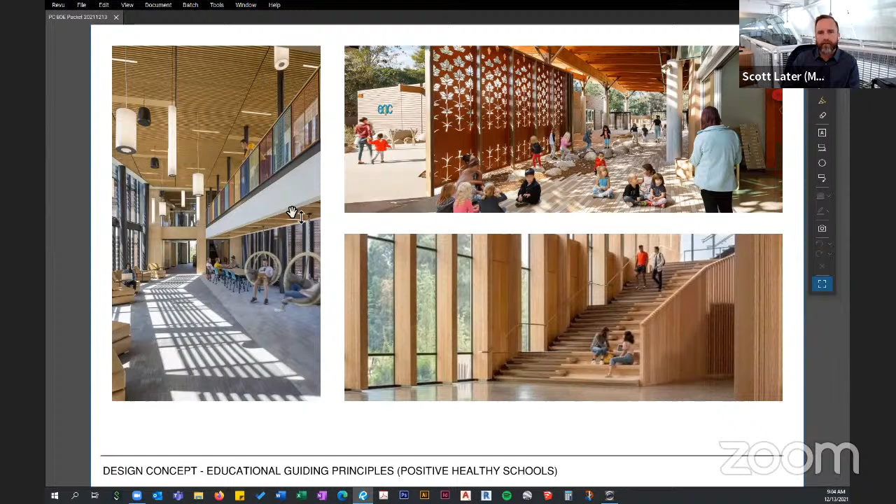The idea of positive, healthy schools, looking at blending ideas of interior and exterior environments, really bringing that outside in. Talking about relationships and finding spaces within both buildings for students to gather to celebrate learning and put that on display.

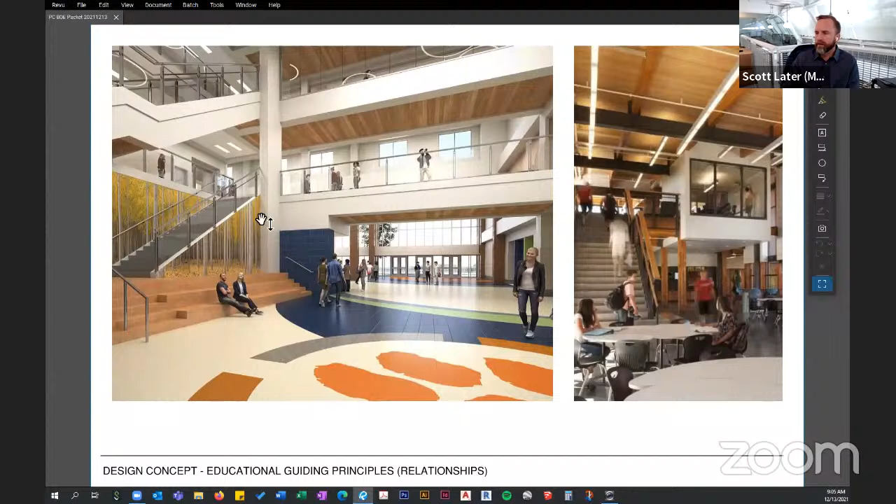As we know, CTE is really a primary function for all of these ideas, underpinned by this idea of real world experience, that these spaces we're developing currently can reflect ideas of connecting to community and to those certification programs already within the district, and looking at how we can bolster the CTE efforts within the district.

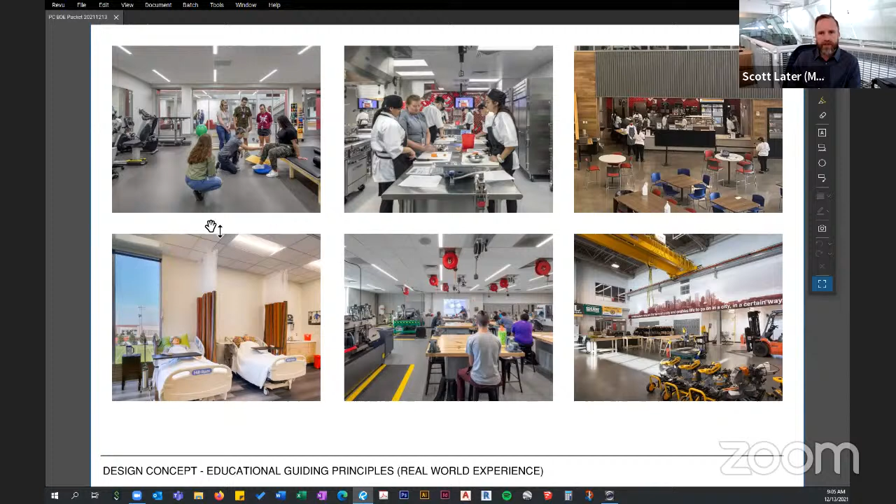We're going to continue to refine these ideas, working closely with Roger and Amy at both schools to understand the specific needs for these spaces. Lindsay Huntsman has also been involved in our work sessions and has been very helpful in providing information about how we move forward on these concepts.

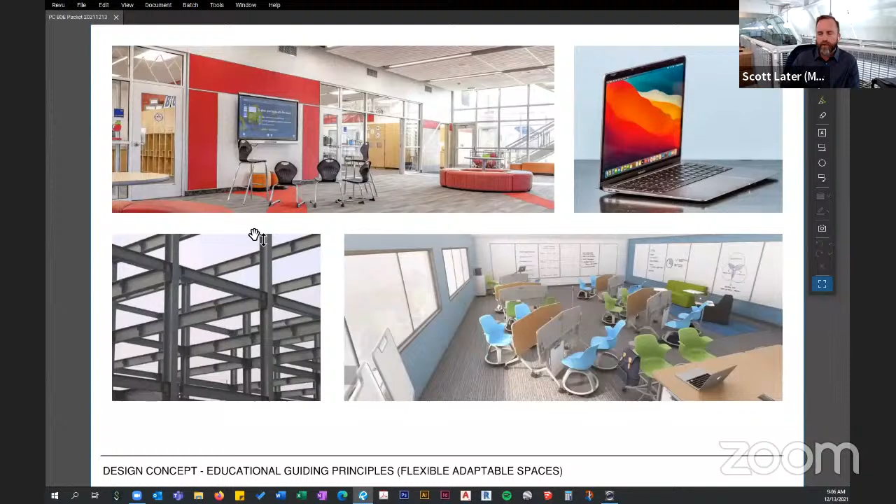In terms of flexibility and adaptable spaces, we are still leaning on the idea of steel construction so that in the future these buildings could pivot and adapt. We also feel it's very important that furniture, technology, and all of these things together can really support the district's goal of creating flexible spaces, and finding the places to celebrate inclusion for all as we move forward.

As we know, LEED Silver is a conversation and is ongoing. We've had some very good preliminary ideas and thoughts about how we can achieve these. I'd say they're still in the cooker right now, and we'll continue to refine those and present them at a later date.

It's important to note that we're understanding the goal of 35 for the EUI requirements for both schools. Wade is on the call today from Van Boerum, and may talk a bit more about this for the other projects. We have a strategy moving forward for both schools to meet these EUI requirements. 35 is aggressive—as a comparison, your existing schools for the high school and Ecker are in the range of about 60 to 85.

And so it's going to be a real big sweep in terms of coming back to that 35. But there's some fantastic things that happen long range in terms of sustainability.

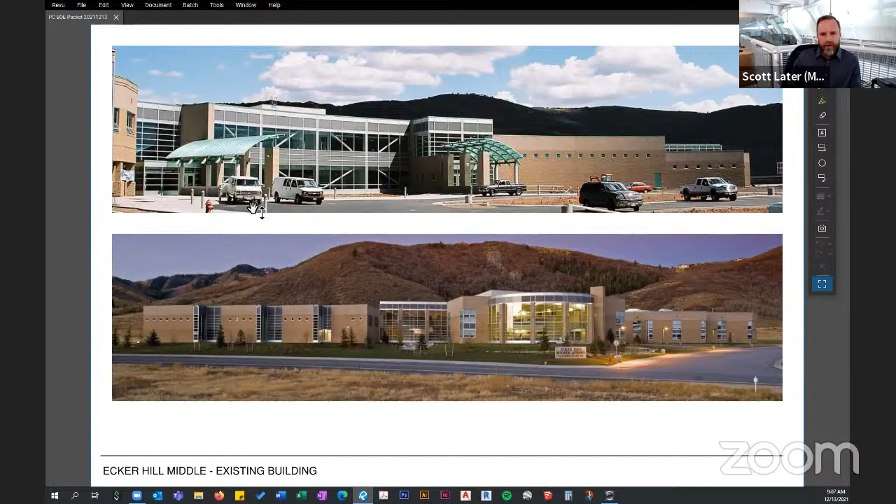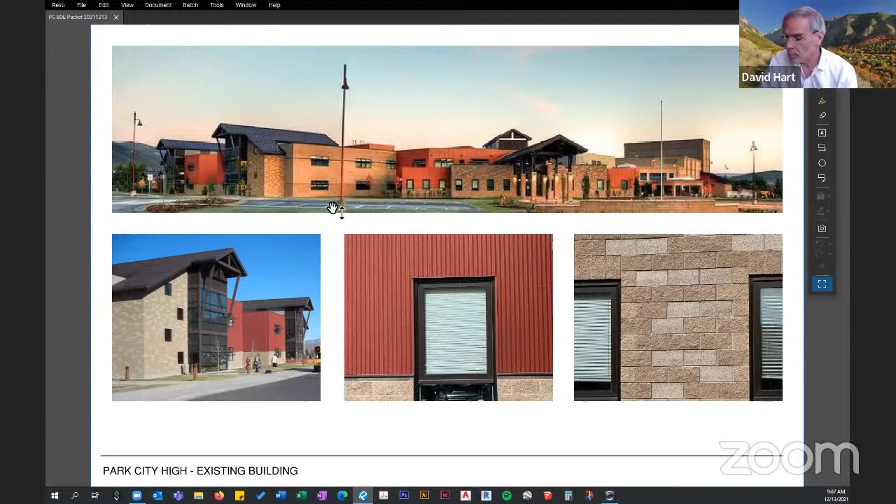So let's talk specifically about these two unique schools. You're seeing on the screen some site imagery we've pulled from Ecker—very unique in terms of characteristics, especially as you're driving along I-80, with a great presence along the foothills. There's also very strong character to the design elements associated with Park City High School, and we want to celebrate all of these ideas as we move forward.

As our team started to look at how we encapsulate all of these ideas, we were really taken by the beautiful scenery that surrounds both of these projects. There's also a lot of site context we felt was important to reflect—lots of textures and patterns. Connection to the outdoors is obviously very important, but we feel there are a lot of design ideas already within the community that we can start to build on.

We also came back to this idea very early on about a concept of a nature pavilion—that both of these structures, both buildings, could take on more of the feel of a higher ed building, a place that blends ideas from interior to exterior. Not that this is necessarily what you'd see at the end of the day, but this concept of more of a pavilion piece sets the stage for future development that could happen down the road.

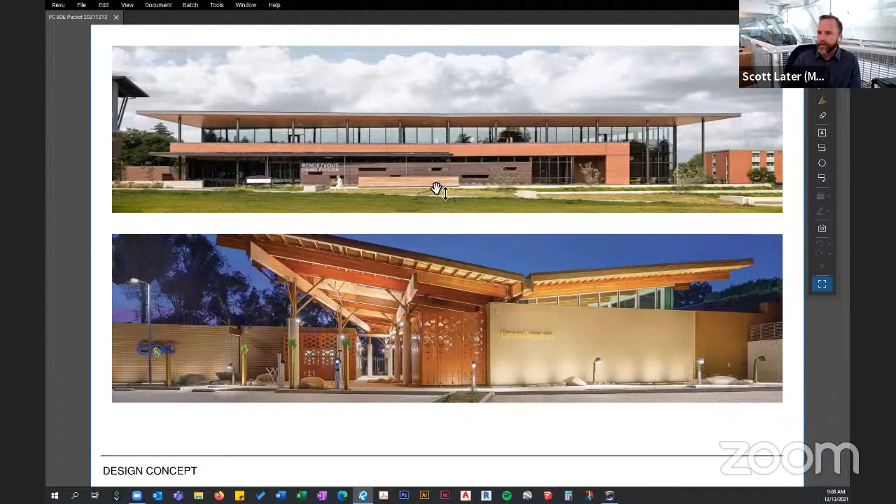As we've talked with Hogan and their team, it really feels like a strategy of having two phases for this project, like we've always discussed, with the CTE wing on the north side being the first phase of demolition. We've talked with Roger and coordinated in terms of where those students temporarily go.

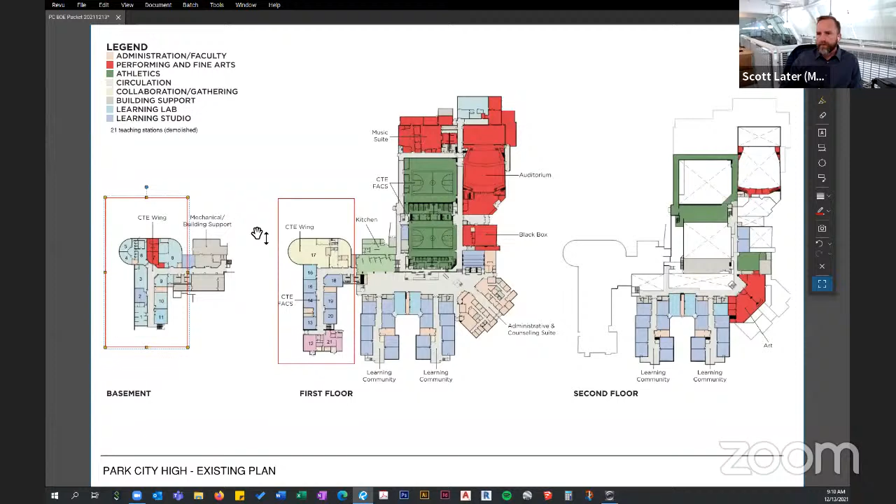So as you remember, the master plan looked at—as we demolish—adding this linear piece along the western edge. We affectionately call this the bat wing, just because the two areas splay.

What we found, though, as we dove deeper into some of the site constraints, is that we wanted to maybe rethink the overall shape and perspective of that piece. To highlight a couple of things we've found since our previous conversations: we now understand there's a pretty extensive sewer line that runs straight through the middle of that site, and that the visitor bleacher, from a pure cost standpoint, would be ideal if we could avoid.

We've started to explore alternative plan layouts that squeeze things down a touch, taking our learning communities, which were initially groups of 7 or 8 classrooms shared around an open collaboration space, and clustering them into groups and pods of 4.

From a pros standpoint, this allows us to keep those visitor bleachers, which could be a future project if improvements were needed to Dozer Field. We can also still provide fire access from Ecker Street to Lucky John.

Additionally, you're seeing the rework of the back of house area. That horseshoe area would need to be regraded to provide delivery access to those spaces and additional parking stalls. This was a request from the PC CAPS group so there's parking available for mentors entering from the backside, and it could also supplement staff parking for food service folks.

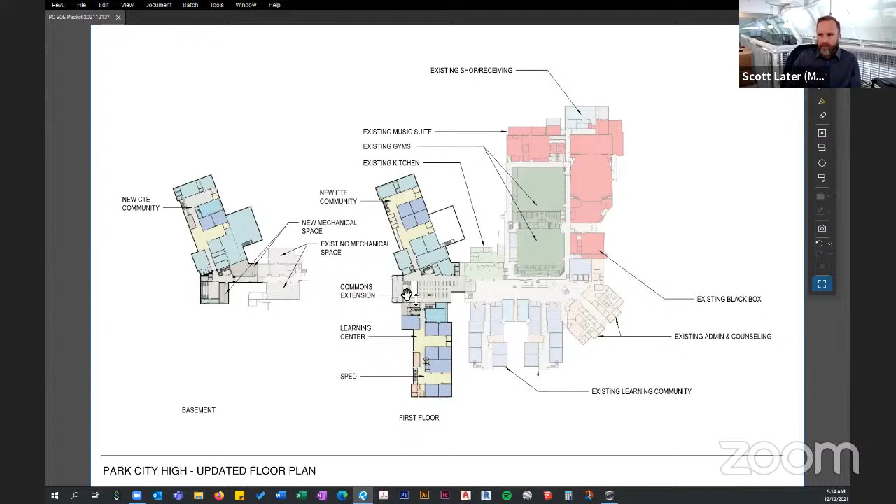One last thing to point out is the expansion of the common space, which should allow for an additional 300 seats in that common area, as well as a new learning stair component that would sit at the end of that space.

As we shift up to the 2nd floor, you have a lot of general purpose classrooms. We worked with Roger on this to understand the number needed, accounting for all the students from Treasure Mountain coming into the building.

At this point, we're at a net gain of 20 to 30 classrooms. So we really have all the CTE spaces, the PC CAPS spaces, and the general classroom spaces, in addition to what we've lost with the demolition of the existing building.

You're also seeing the introduction of a new media center space. As you'll remember, the current media center has been allocated to the PC CAPS program, and there was strong consensus from the community, Roger, and his teams that there needed to be a space for community gathering as well as celebration of the media arts.

Before we shift to Ecker, can I answer any questions about the PC High School project?

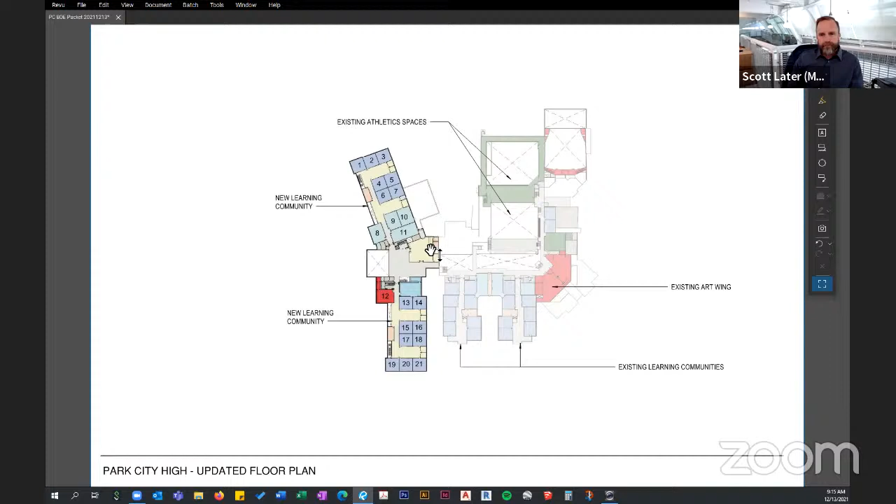Yeah, one question, this is Andrew. We've gotten some questions about the use of parking during construction at the high school. I know you've probably been asked this before, but since we're on this call, what is your anticipation of the number of spots we'll lose during the construction project? Not overall, but we have Park City Mountain and others who use our lots during the year, and they're redoing their lots, so they'll be relying on us to provide ours. We want to make sure that if we're losing a ton of spots during construction, we can communicate that to them.

Great question. It's something we're currently evaluating right now. John, I don't know if you have any additional feedback. We for sure during that first phase lose a lot of the back of house areas, which is not necessarily where you guys are parking currently.

As we shift to phase 2, there will be an impact zone. Really, it's kind of undefined at the moment because we don't know how wide of a scope we have for that front parking lot rework. There's a lot of, I guess the technical term is squirreliness, as you get in and out, as you park, as parents drop off, as buses are interacting in that zone. We're going to try to clean up as much as we can for the budget that we have.

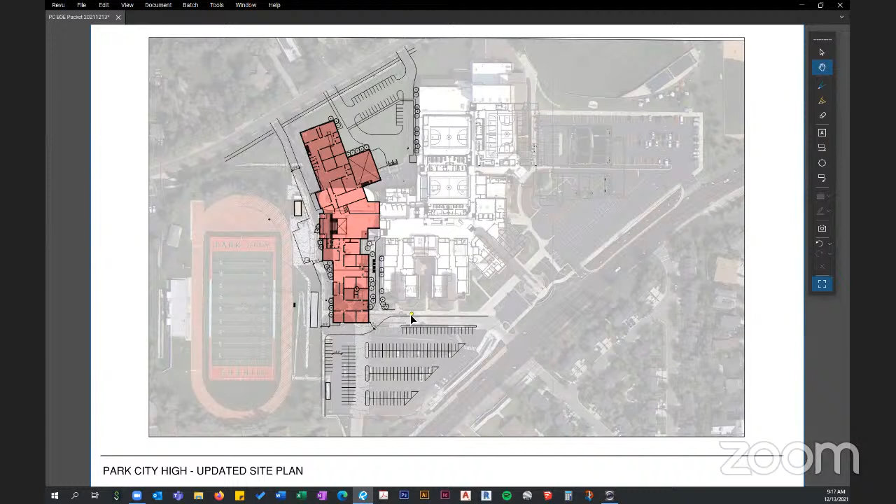It could be that that zone that's clouded right now really gets impacted, which could be 100 or so stalls. But Andrew can follow up with some information about that, as well as a more detailed phasing description and timeline. The Park City Planning Commission has asked us directly for feedback on that, so as soon as we can get an estimate, even erring on the side of a conservative estimate in terms of the max dislocation, that would be great.

Any other questions about the high school?

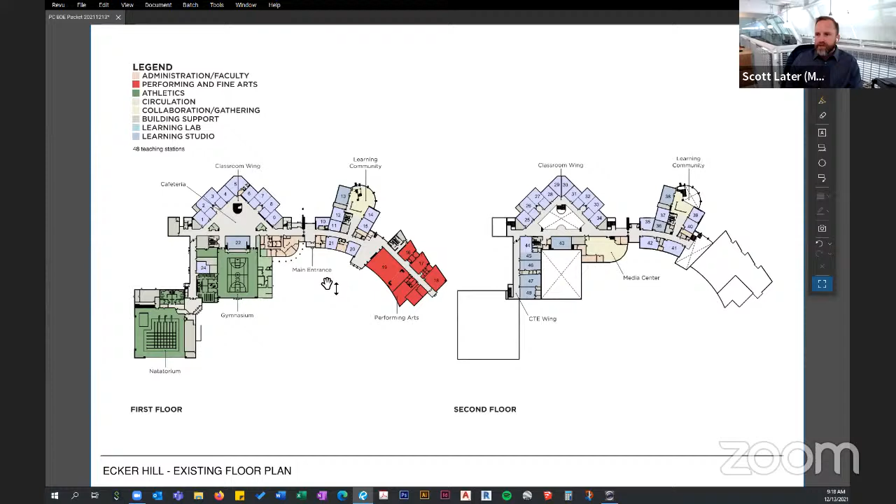So similar conversation to Ecker. Again, you're seeing the existing building plans on the screen. As you remember, the right-hand side of that existing building is the newest portion of that existing structure. So really our focus with the master plan effort was how can we maximize the area on the oldest portion and kind of shuffle the cards just a touch.

Really the overall plan stays consistent, that with the addition of the new gymnasium, that will allow us to reconfigure the existing gym into the cafeteria space, which then opens up the heart of that building for a new CTE maker space, showcasing science and learning on display. And then we pick up an additional swath of classrooms around the perimeter of the building.

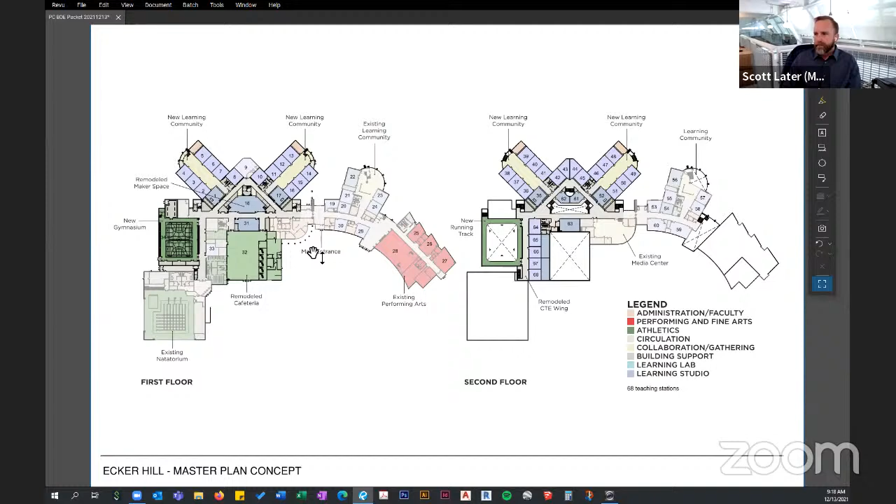From the master plan to where we are now, this stays very consistent. One of the ideas developed as we looked at this with a construction partner was minimizing the impact to student activities during construction. Initially we had planned to demolish a portion of that building and then add that back. There was a thought that, what happens if that remains in place and we push all of the first phase of construction outside of the existing building line?

So you're seeing in blue the existing building. The red is the new additions that would tack on to the end of those existing learning communities. During the construction process, we would make the necessary connections and penetrations back through that area. Again, the red is indicating the new zones of construction. Really, the remodel work is focused on the center of that building, primarily on the heart of the building, as well as the cafeteria space.

One other thing of note, as this is on the screen right now, we're currently evaluating where the buses go. As you know, with the increase in students at the school, we're going to pick up some additional buses. We're anticipating that we'll have 20 to 22 buses on site. Currently your buses enter on that north area, and there's a secured drop-off zone on that front.

We're exploring two options. One is potentially shifting all of the buses to the front of the building to provide better access. This would allow us to pull all of the parent drop-off onto the north side, which would alleviate the concern that happens currently where traffic backs up into Kilby. We're also exploring an option with the district to purchase an additional portion of property on that northern side. I know that's still under discussion, but it could supplement some of the parking needed as we look at the overall site plan, in addition to adding additional faculty members to the site.

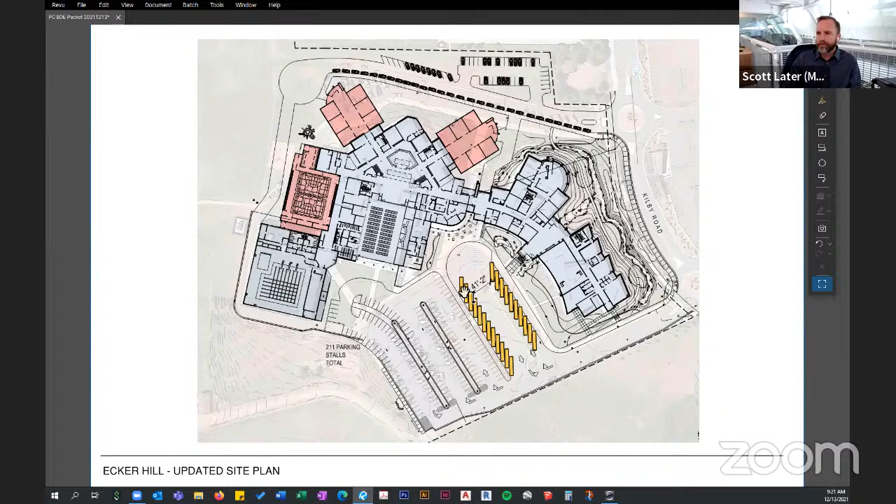I would say that both of these ideas are still under consideration at this point. Nothing is finalized. We are still evaluating as well whether buses end up on the northern side and parking remains as is on the south side.

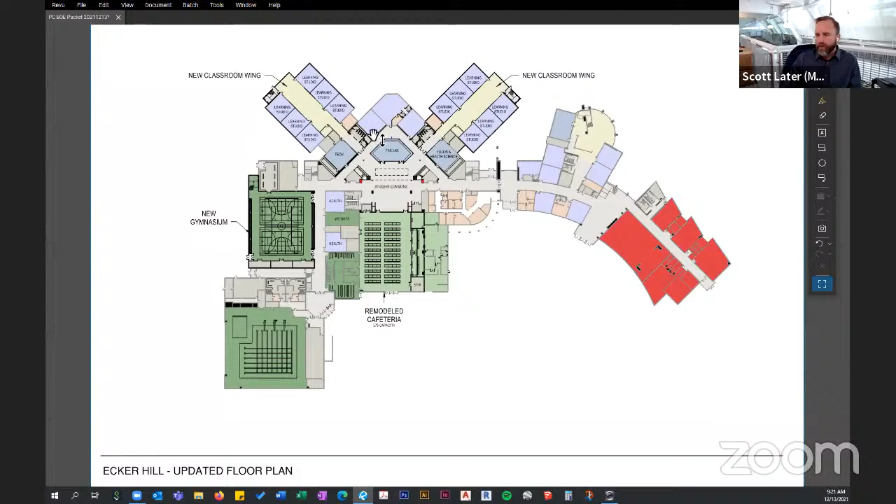So looking on the inside of the building, again, this has stayed very consistent with the master plan efforts. You're seeing the remodeled cafeteria space now that we have the new gymnasium area. That student commons area really becomes the heart of the building, which flanks and allows us to add these new learning community wings. In this case, we have 6 classrooms per wing, and those stack 2 stories. And then we're looking at adding additional CTE space around the existing perimeter of that core of the building to really showcase science and learning on display.

The other topic we're considering with Amy and her staff is a shuffling of the location of the science classrooms. Currently, some of the CTE functions are happening within that part of the building. Now that all of those center into the existing part of the building, this opens up real estate to create a science wing for the classrooms, with shared support space and a good relationship with the CTE areas in that area.

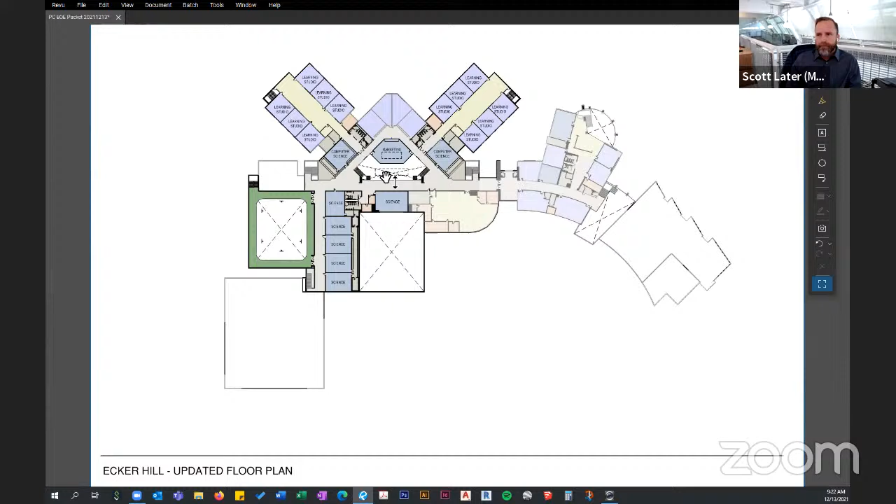Any questions about the overall plan and strategy for Ecker Hill? Okay.

In terms of overall update, you're seeing kind of a crude schedule that talks about where we're going and where we've been. There was fantastic support with the pre-design and bond support services, culminating in a successful passage of the recent bond. We are right in the midst of schematic design with our team, and anticipate that the schematic plan, both from the interior and site perspective, would be locked in by the end of the year.

This keeps us on track to refine that design as we kick off 2022, so that Hogan and their teams can get on site as soon as things start to thaw out. We anticipate an early bid package issued around the March timeline, with full construction documents issued in June. This gets us rolling without pushing past what we've talked about regarding the overall phased construction approach, with an interim mid-stage occupancy over the summer of 2023 and final occupancy in 2024.

With that, that concludes the presentation we have from our side. We'd be happy to answer any questions or clarify any items for you.

Thank you, Scott. That's a great overview, and I really appreciate you catching all of us up on how things have been going. Thank you so much for the time you've dedicated to hearing from stakeholders. I think it's been really productive and helpful.

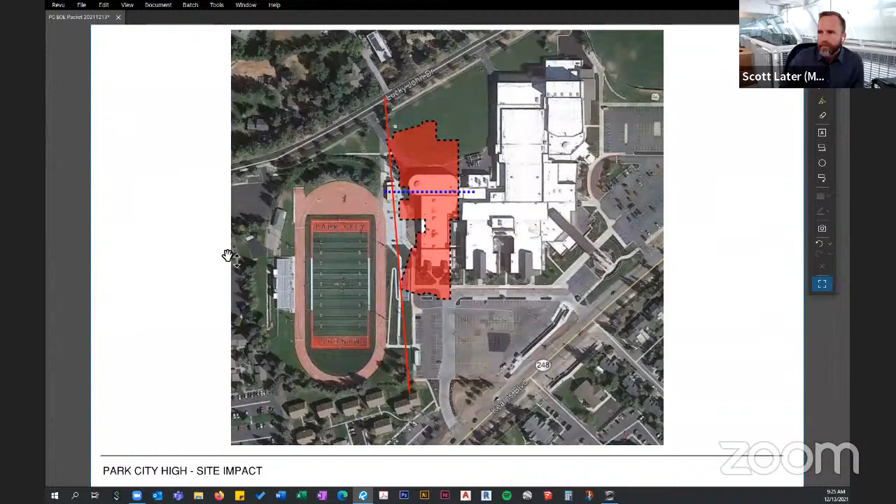Sure, you bet. We're very early in terms of concept development on those ideas. At this point we've been focusing on the EUI, the energy use intensity, for both of these buildings. With both existing buildings in the 60s to 80s range, there's a lot of legwork needed to meet some of the energy goals for the project. There's been some development, and Van Boerum, who's on the line, has assisted with the discussion about what mechanical system goes into both of these projects to meet those targets.

At the Park City project, we're leaning on a very innovative system with some built-in redundancy that would allow us to hit that target. One advantage of Ecker is we have additional real estate and are able to add a geothermal well field on the northern edge, which allows us to get an even better EUI for the new construction areas.

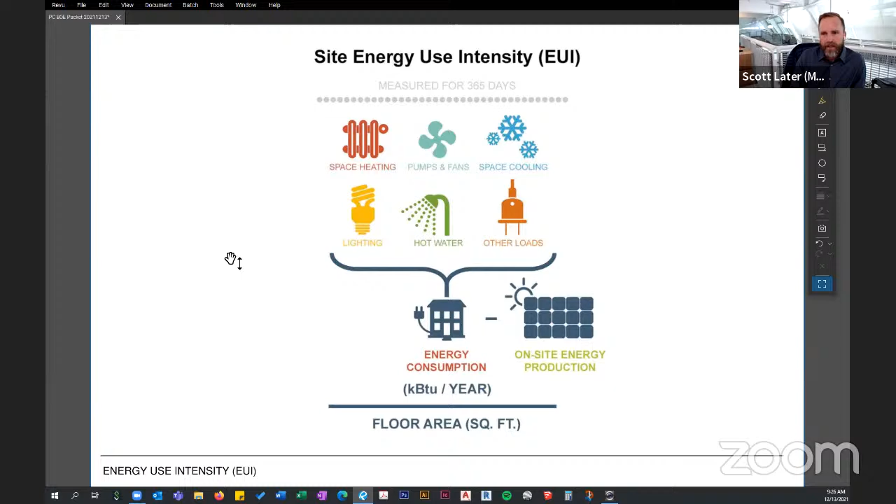Just go to the next slide. So I'm Breanna Bonsavage with VCBO. I've got several of our team members here in the room: Hughes, Mike, and Greg. We've got George here on our team and Whitney, and a few stragglers missing that are probably on the call. We're happy to be here this morning to update you.

Starting off, we just have a couple slides with the master plan on there. We've been diving into the master plan, the ed spec, evaluating your sites, and meeting with stakeholders. We'll get into that a little more in a minute. But we're in the middle of program verification right now on all 4 schools, and schematic design on Parley's, Jeremy Ranch, and McPolin. We're starting a little on Trailside, but that one will take a back seat to the other 3 because they have construction starting sooner.

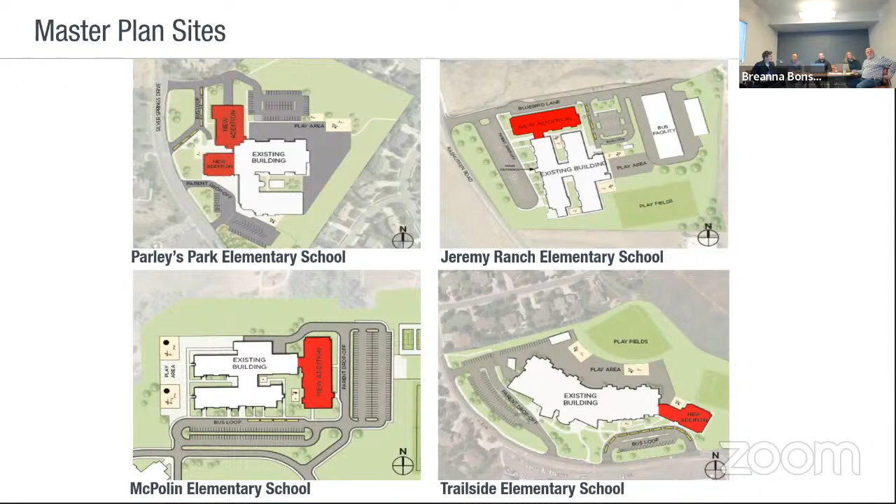So with program verification and outreach, we've met with several stakeholders. You were with us for most of those. We've recently started reaching out to your early childhood educators, community ed, special ed, the principals at Jeremy Ranch and McPolin, and we'll schedule shortly with the principal at Parley's Park as well. We've started getting a lot of feedback from these folks and are starting to massage the plans now a bit to meet some of their needs and to get that program verification completed.

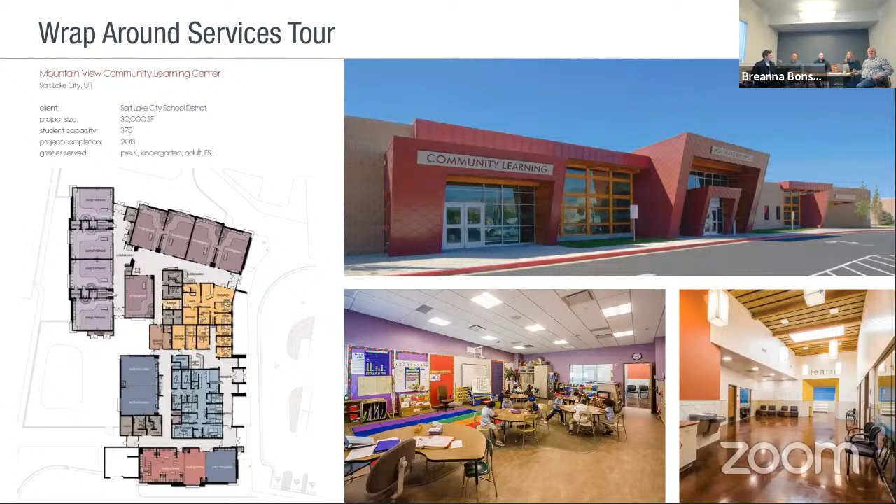One of the things we've begun doing with these groups is to start touring similar facilities. We recently went out to Mountain View Community Learning Center and toured their facility. They've got a campus right there, but they have the wraparound services—they call it community learning, and health and wellness. We got to tour through there and see how they're tackling some of these programs and get some great ideas from them, which we've been able to talk about and implement into our plans as well. In the near future we're going to visit a preschool, I think it is, in Brigham City, which we need to get scheduled soon.

For example, one of the things that we found in the wraparound services is that a larger community-oriented kitchen and cooking area is really important for that sort of community engagement and need. So we've reduced some of the open office space and flipped that into more of a kitchen and community space. The wraparound services specifically are still being refined as we move forward. We have a lot of great spaces identified, and exactly how many of them are dedicated to various uses is something that will be refined in the near future.

The shared spaces for the community—the multi-purpose room, community education room, living room, pantry—those have stayed very consistent through all of our conversations.

We've also been refining the early education spaces, the learning studios, the quantity and the support components associated with those, and diving a little deeper into some of the specific needs, for example for the STEAM studios—art, science, music spaces—that we'll be providing there as well, and a deeper dive into understanding some of the SPED and OT-PT needs for the various schools.

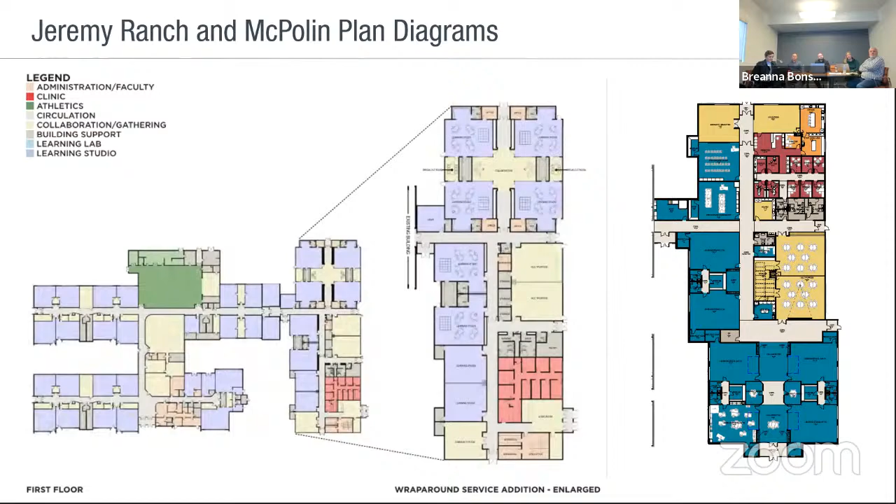Let's go to the next one, got some blow ups. So here's a blow up of the wraparound services area on top, and on the right here, there's the community ed space, same as what was in the master plan, the living room. Off to the right is the kitchen and work area that Whitney was just talking about. We're planning on having that kitchen space be for classes or community space. So we're showing an operable partition in the living room to open that up when the need arises. And then we've got the reception and secure vestibule there into the preschool and into the wraparound services.

We've tried to keep that as separate from the preschool as possible. Next to the left are the STEAM studios. They've identified the need for a more acoustic space, which you see on top for music. There's some storage still. On the bottom, we have more of the science art STEAM studio, so it'll have hardier finishes, more storage, some storage sink in the classroom, as well as storage off to the side there. The OT-PT room is right there as well, so close to that connection to the existing school.

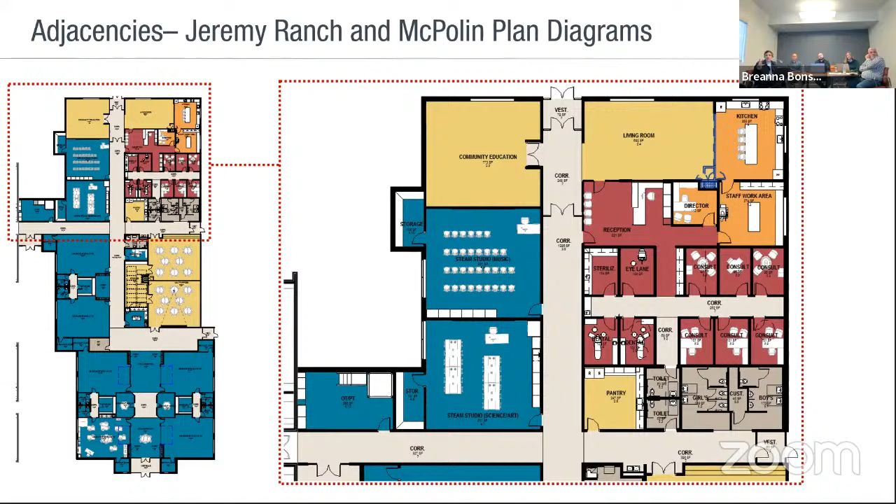There's some storage and items within that space that we've gone through your special ed group to identify. The one thing you'll notice in the areas shown in red, we're showing a number of different potential configurations to illustrate how different services could fit in that wraparound cluster. Again, these ones will be refined as we move forward.

And then in the center of the addition here, you've got on the left your learning studios for more of your 3-year-old age group. They each have a breakout quiet space. There's cubbies off the corridor. That little space could also be a bit of a small collaboration space for them, shared between the 2 studios. There's a corridor that goes to 2 toilets.

Before, the toilets were dedicated to each room, but we thought it might be nice to have them combined together, so if you have some backup or whatever, and then the storage room between them would be shared.

Off to the right is the multi-purpose space. We've combined some of the storage that was there before to accommodate table storage. The users have identified wanting to be able to have the students in the pre-K eat in this space, as well as use it as gym, aftercare, etc. So we wanted to have a lot of storage for those tables. There's also a little workroom there for faculty, and we've been refining what goes in there. There's a special ed office just above that and a dedicated restroom with a shower in it.

And then at the bottom here, we've got the pre-K for the older group, so we're saying 4 to 5-year-olds. Some changes to that: we've taken that corridor between there and stretched it out and made it more of a collaboration space.

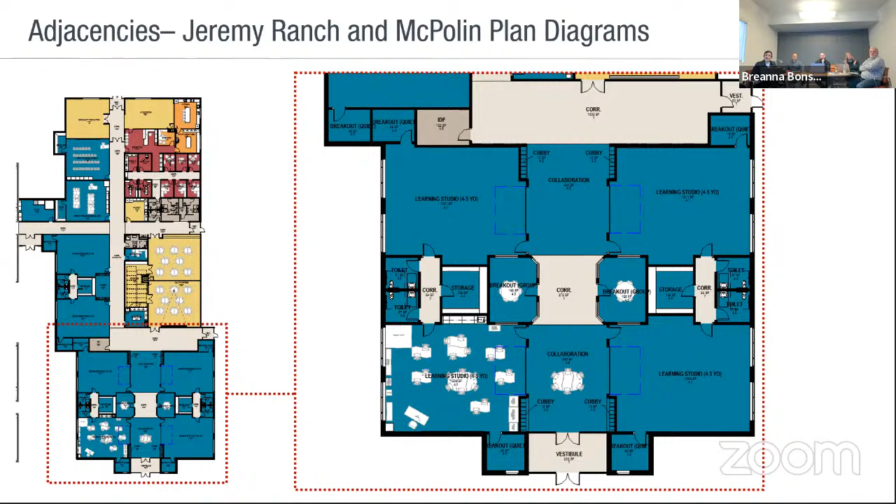Again, just like up in the 3-year-old section, some of the storage rooms and toilet rooms that have been separate are now combined in a core, so they can be shared. We have a little bit of millwork in those spaces. You can see in the bottom left how we're defining what that might look like. There's also a shared larger breakout group with some windows in it, so you can watch the kids when they're in there, as well as access from the corridor. Special Ed has identified wanting to be able to take students into those spaces, so they didn't want to have to go into the classrooms to grab kids and bring them in there.

So we've laid out some flexible furniture in there just to show you what could fit in there, what that could look like. We're planning on most of the storage and things in the classrooms being flexible.

Let's see, did I talk about the breakout spaces? So these also have the small, quiet breakout rooms if someone just needs a little bit of a break. Again, the cubbies are off of the corridor. That was something else we got feedback on, that they didn't want that in the classrooms. And that's it for that.

Anything I missed, you guys? Okay.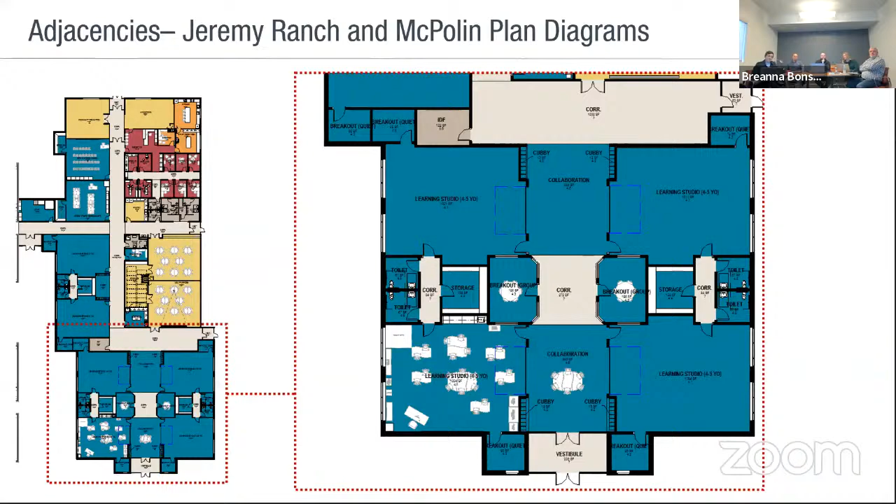We're still working through some details of the dock right now because we know that does recess down, but we're kind of working through that.

We've met again with the principal and we'll work through some of the playground components. Right now, we've sort of taken one for one what's there, minus combining. You have two big toy areas right now; we combined it into one. So that was something that came up that we're gonna dig into some more and maybe add another one in there.

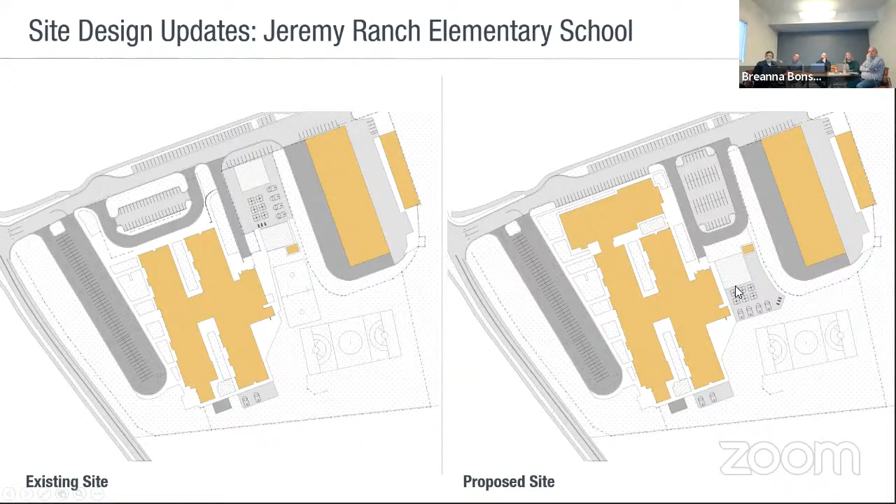I'm so glad to see you guys are thinking all about that parking and drop off. And I like your solution. This is looking really well thought out.

Thank you, yes of course. Yes, that did come up in a number of our meetings. Everybody wants to make sure that the kids are getting in and out of the school safely. So it is a high priority.

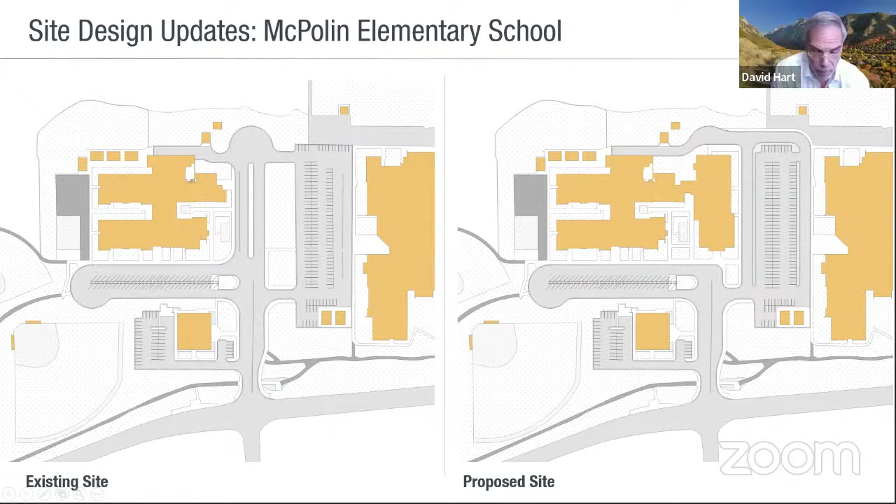This is Andrew. Who's providing input on the wraparound services? Do we have any contact with anyone from Intermountain or People's Health Clinic or anyone of that nature, or who's the point person on that? So we have started working with Early Childhood Alliance. That's been the group that's provided some research, and Kristen Schultz kind of leads that group. They meet monthly, and they do have reps from Community Foundation and People's Health and all that. Yeah, awesome, thanks.

Any other questions before we move on?

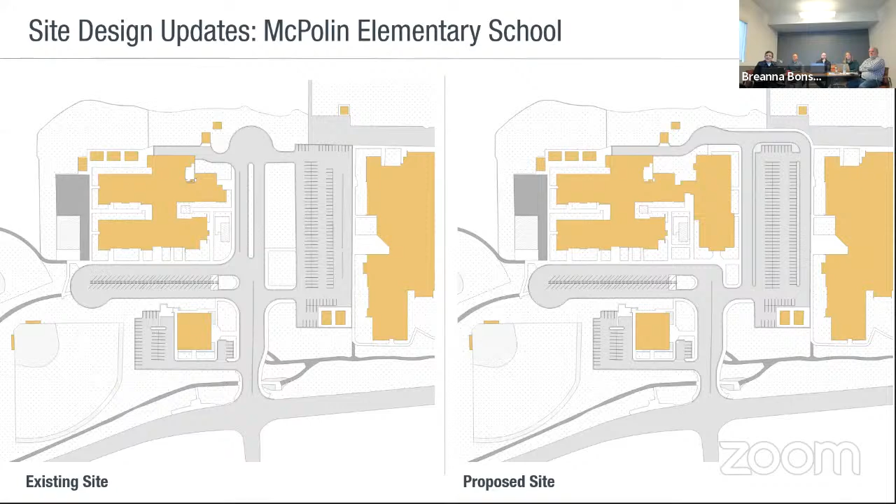I'm gonna go back to the schedule. Technical difficulties. So really quick on schedule: right now we're still on task to start construction this late spring. Still planning on having the school for Jeremy Ranch and McPolin open prior to the 2023-24 school year.

Right now, again, we're in the middle of programming. We're wrapping that up, and we're in the middle of schematic design for those two currently. And then Parley's Park.

And then programmatically for Parley's Park, it is a little bit different. So one of the key programs we wanted to understand is, of course, the multi-purpose room and the cafeteria program. And so we've been looking again at the master plan concept diagram, making some small refinements, very minor in this case, and then also making sure we understood the need for the learning studios for the early education group.

Again, for learning studios for Parley's Park, and the associated support spaces and collaboration, as you just saw with the other two, we want to make sure there's parity between all four of the elementary schools in the early education professional learning community. And so you'll see consistency through all of them at this point.

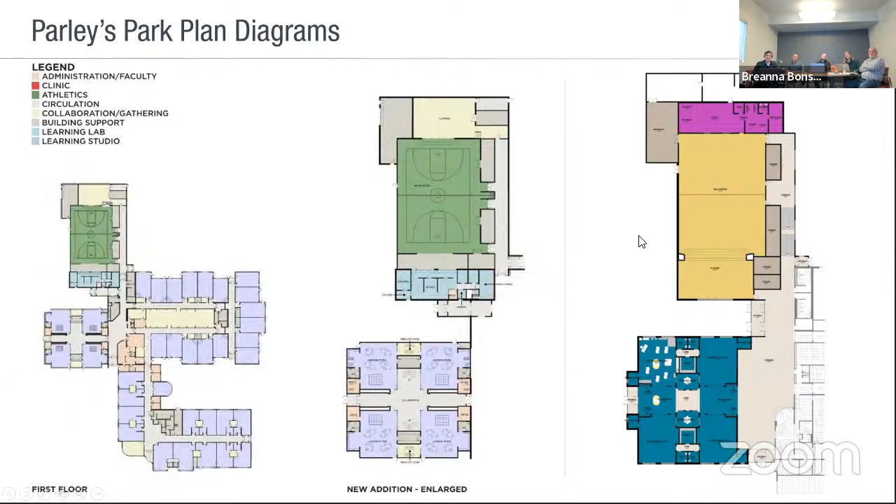So to Whitney's point, the 4 learning classrooms down here in the blue on the right are very similar to what you saw in Jeremy Ranch and McPolin. Well, similar - they're basically the exact same floor plan, just plunked into that existing school off the main corridor, off the entry there.

You can see that mechanical room and kitchen spaces up at the top. One thing here, we do have some grade change, so right now we're proposing in that corridor off the multi-purpose room just putting in a ramp right there. You'll go down the corridor and then start to ramp down into that multi-purpose, so your platform would be flush with the main floor.

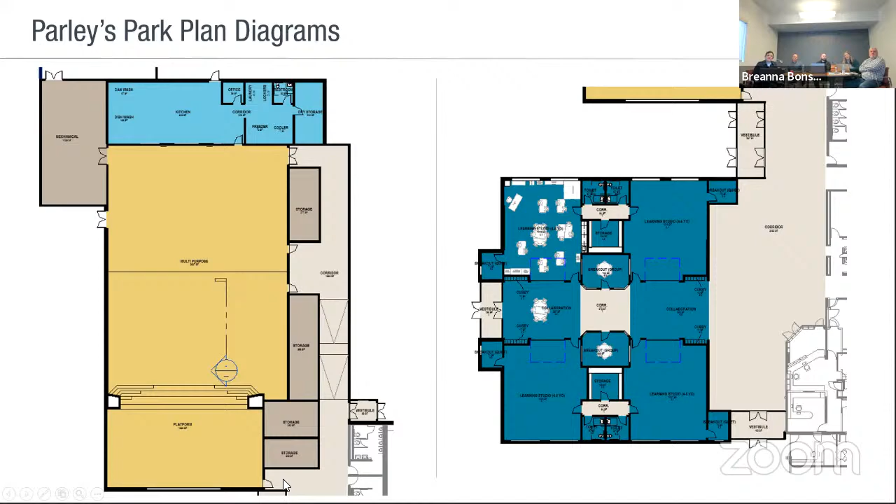So this dives into that schedule. Phase 1 for the gym area will begin this spring. Right now we have Jeremy Ranch and then McPolin, and then Parley's going out to bid in the spring, about 2 weeks apart from each other. So this first phase will go out in the spring and be completed before the 2023-24 school year, and then we'll start demo and construction of the next phase in the next school year.

And then Trailside - we'll touch on this briefly. We've been working through programming and schematic design on Trailside, but we'll be focusing primarily on those first 3 elementaries and then revisiting Trailside in the next year.

And again, as we move into the floor plans, the learning studios for the early education are very consistent. We'll work through the learning studio needs for the 2 additional spaces to make sure that we're hitting those targets in the future.

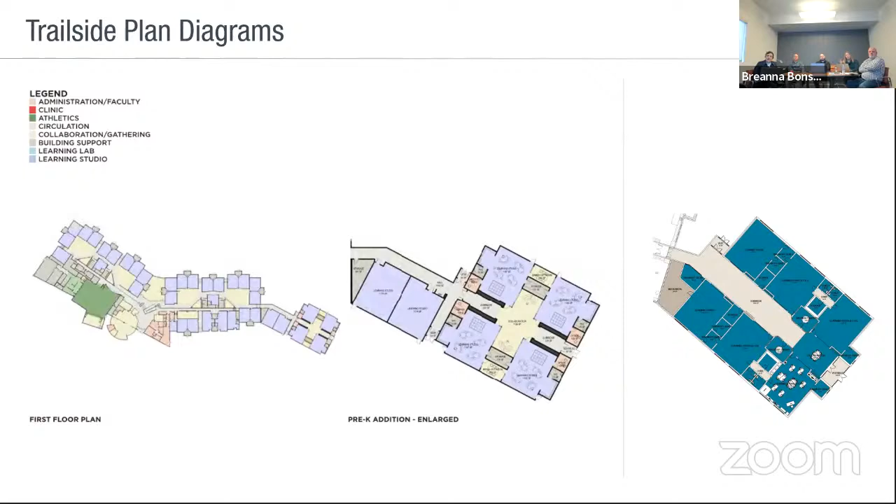So again, this is existing on the left, master plan as well, and on the right is our initial takeaway. We have the 4-year-old older learning preschool kids, and then the other 2 learning studios. Instead of having the 2 kind of off to the side, we've combined them so they can all have the opportunity to collaborate between one another.

And we've added a little space for mechanical in all of the schools - we need to allocate some space for the mechanical systems. In Trailside, we may be able to attach on to what's existing, but we know we'll need some new. With the other schools, we're going to need a new mechanical space for each of them. That's something we're going to talk about here in a minute, so I won't go into it - let's go to the next slide.

Are there any questions on Trailside or Parley's Park?

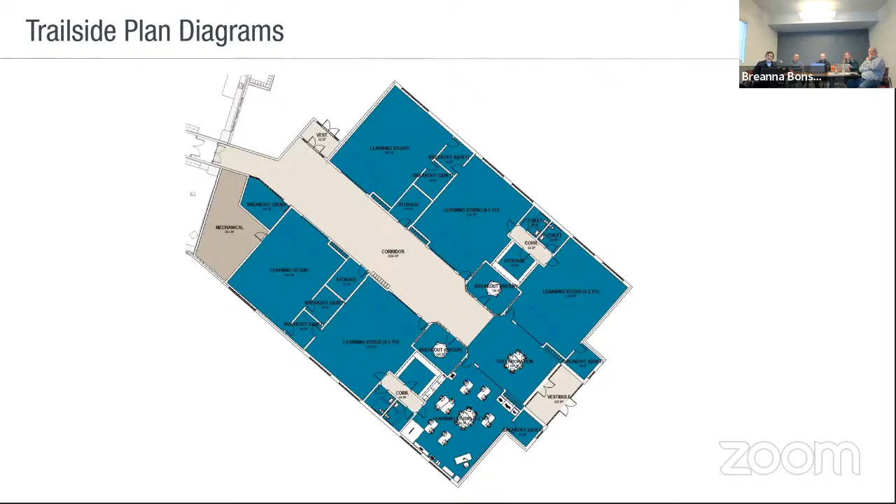No, thanks for the outline. It's great. Okay, let's go on to the next.

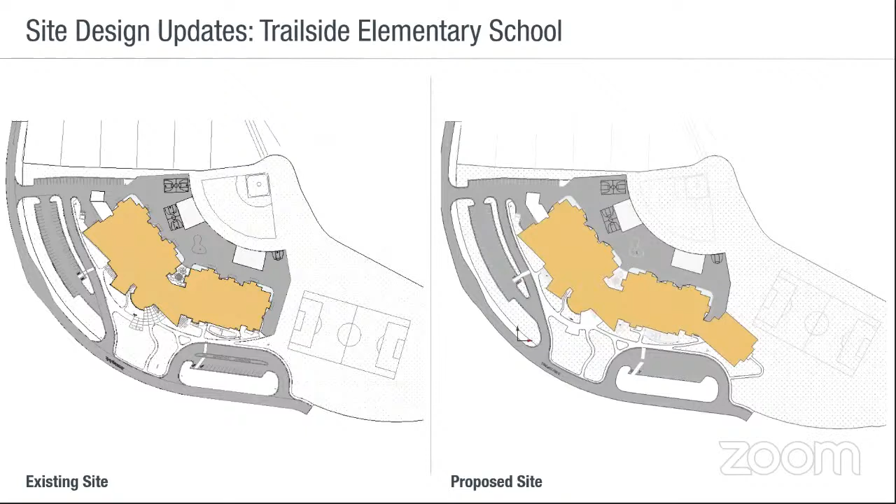Site plan's still roughly the same. We'll get into that more as time goes on, but here's where we're at currently. And on schedule, we'll be focusing more on Trailside for the following year so we can be open for the 2024-25 school year.

We wanted to talk to you guys about mechanical systems and approach and get some feedback from you. We're trying to hit that EUI 35. There's some pluses and minuses with various systems. Our mechanical engineer, Wade, has been evaluating what we can provide you to hit that EUI 35, but there's some pros and cons we want to go through with you. Wade, do you want to talk more about that?

We're going to focus mostly on Jeremy Ranch and McPolin right now, but we're having the same conversations on all 4 schools right now. Yeah, thank you, Breanna.

I'd also like to say we have similar issues, and I think Scott's brought that up before, with Ecker Hill and Park City High School as well. And what's happening to us is with the EUI mandate of 35 - that's a really aggressive EUI for the Park City climate.

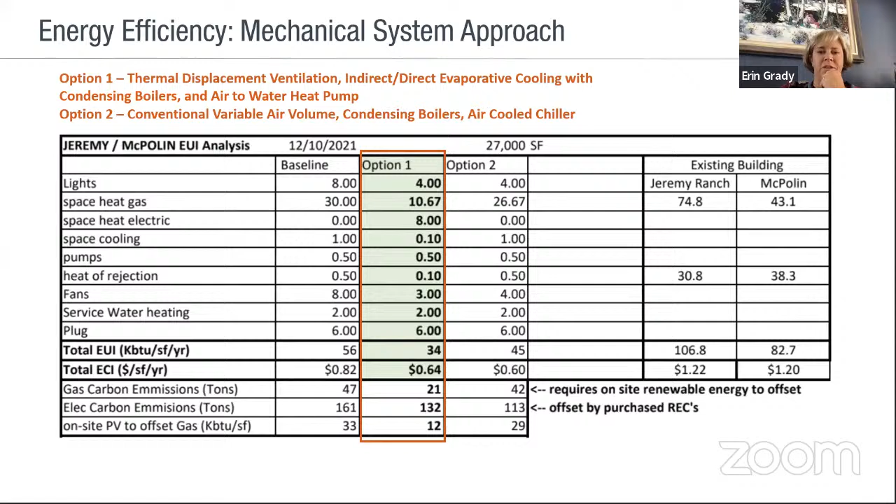Wonderful, look at us running on time, even a little early. It's awesome. Great. MHTN, anything else you wanted to share before we close out for the day?

I don't think so. I think the conversation that Whitney led off in terms of the EUI relates back to the high school and Ecker project. And that discussion about providing a blended EUI number - at the end of the day, we'll put that on our to-do list as well.

Great. VCBO, Hughes, anything else that we did not mention that we feel like we should, but we have the board with us? I think we're set.

Excellent. And then David, did you want to provide a quick overview of what we'll do tomorrow for the board meeting for the public? Sure, thank you. What we'll do is touch on each of the schools briefly. We will not go into the same level of detail that the teams went into today, but we'll give you an overview as to the plan, the original plan, and where we are on that plan today and how that's being implemented. And we'll touch on your priorities and how they're being implemented.